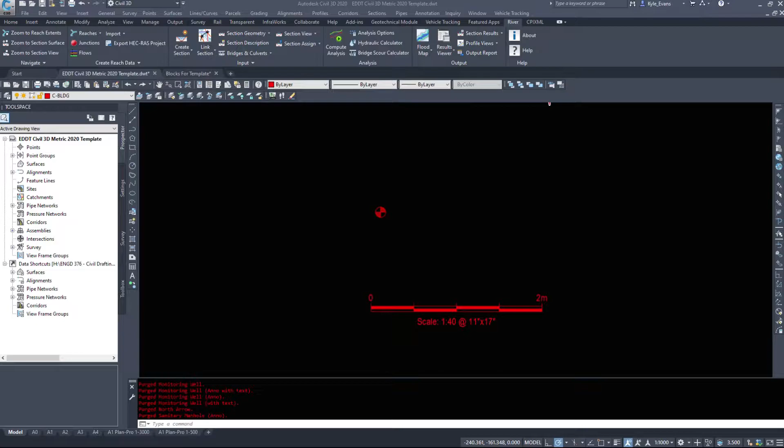Where I found this extremely useful is mainly under scale bars, under borehole or monitoring well blocks. If I want to change the color, I can quickly do that on the fly. However, the main one I use it on is my scale bar.

I'm not going to show you the scale bar option because it gets way too detailed and complicated with the various lengths and the various scales, and it's different. It's similar but different between Canada and the US, where we're in metric and imperial.

To demonstrate the visibility lookup, I'm going to click my little drop down arrow here. And inside of my scale bar, I have everything from a 1 to 10 scale to a 1 to 300,000 scale built into the scale bar itself.

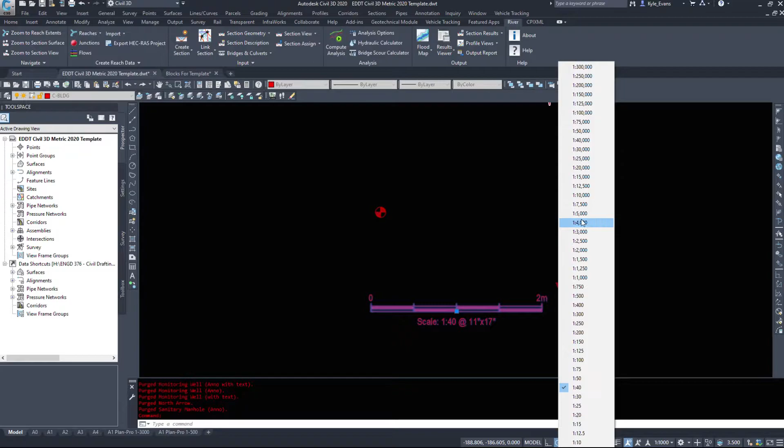So essentially, I've got about 25 to 30 different blocks within this block. Any option I select changes the piece of text in the top right and the piece of text down below. So I've selected 1 to 4,000, add an 11 by 17 drawing. I've got scale bars for 8.5 by 11 and D size paper, 22 by 34.

And I can select whatever options I want. Now I place this scale bar in paper space, so whatever scale I choose to set my scale bar to, I know it's always correct.

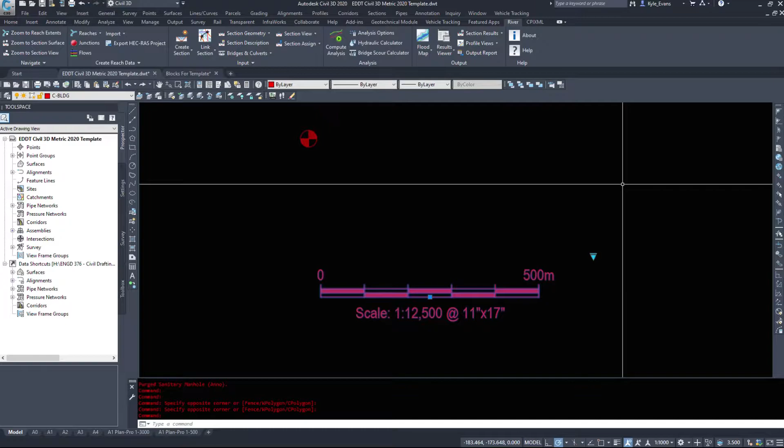I also don't have to rely on the built-in ones within Civil 3D, as I tend to see that those do happen to cause problems and general issues for the user. So any one of these I choose, we see that the spacing of the hatch changes, the spacing of the lines changes, the text changes.

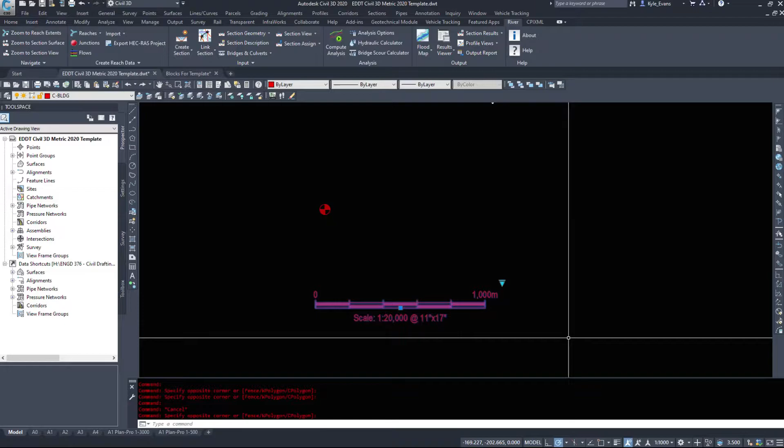Essentially a one-size-fits-all block here. We're not going to do a scale bar in the visibility parameters. We're going to do a simple borehole that we can choose blue, green, or red and work from there.

So again, I'm just starting off with pieces of lines, arcs and lines, and I'm going to make that a block. I'm going to name this borehole. I'm as well going to pick a center point, and my objects I'm going to specify.

This one I will make annotative because I tend to put my borehole blocks in model space, and we want it to adjust to our paper size. It just gives us the ability to add additional options. I'm going to hit OK.

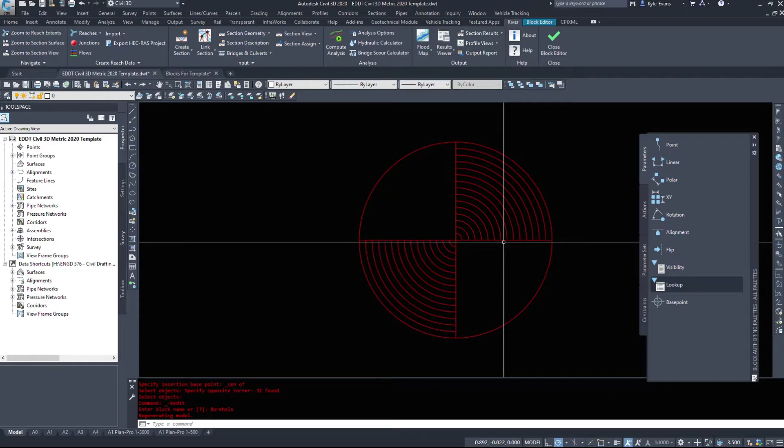And I had to click redefine because I already had a borehole block in this drawing. However, we're now inside the block editor.

Again, we're going to look under the parameters tab, and we want a visibility parameter. I'm going to place that in the top right of my borehole. And for some reason, it defaults me to the River tab, but I want to go into the block editor tab, where usually this section is grayed out.

So if I delete this, this is what we're given. I can place the visibility back in, top right, top left, put it really wherever you want. My visibility states now pops up.

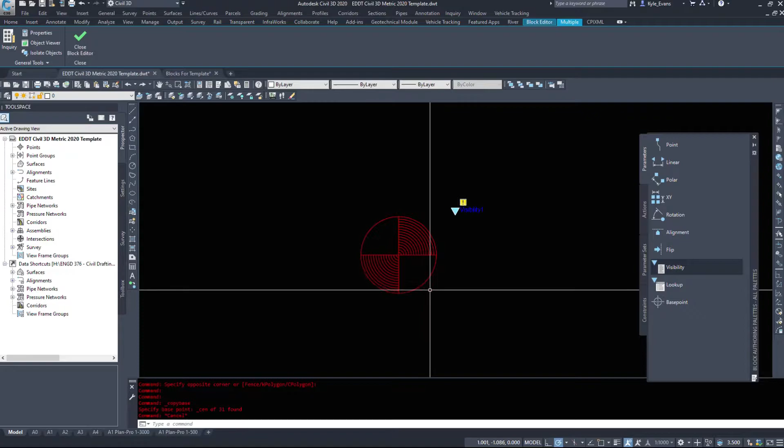However, I am going to copy what is here, just copy it at the center base point, 0, 0, so I can paste it back in. I'm going to also change these to print color 10. So this visibility state, the default visibility state, I'm going to have print color 10, or it'll print red in my template.

We can choose visibility states here. We want to access it with this button right here. It'll open up our visibility states window, and I'm going to rename this red borehole.

I want to create a new visibility state. We're going to call this one blue borehole. And I want to hide all existing objects in the new state because I want to create an entirely new set of objects. I'll hit OK. And that's set current. If we hit OK, our screen, the borehole disappears.

So I am now going to paste this back in to 0, 0, 0, and I'm going to make these color, we'll do 170. If I click the drop down arrow here now, I can switch between red borehole and blue borehole. Let's create a couple more visibility states.

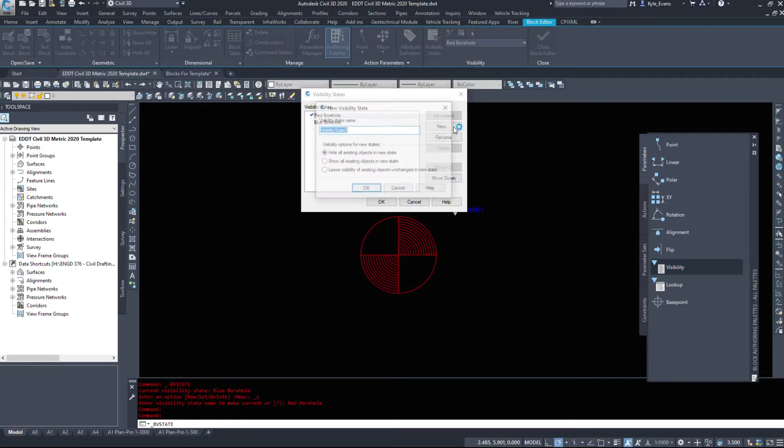We'll name one green borehole. And again, hide all objects. We'll make a new one, purple. And finally, we'll do a pink.

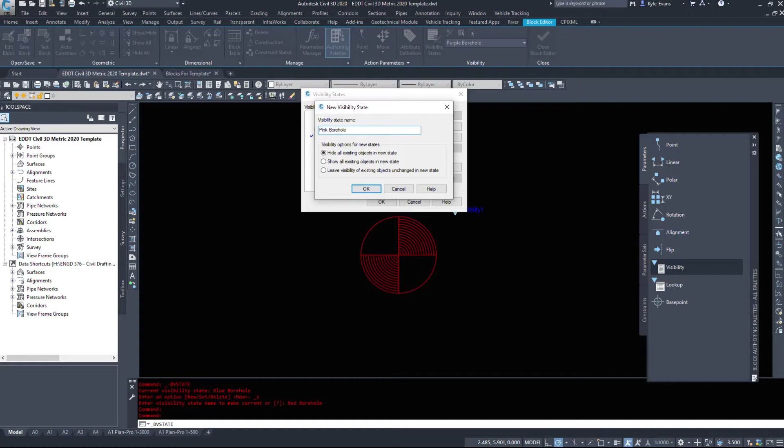So you can have any number of visibility states. As you saw by my north arrow, I've got about 30 in there. A lot of different options, a lot of different things you can do.

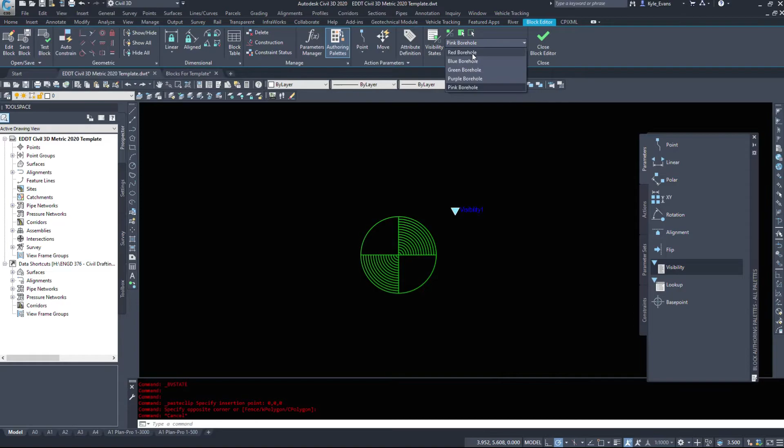So again, I'm going to come in here and paste that back in. And I believe this was set for the green color. My color 90 prints green. Or sorry, I was on pink. So we'll actually go back and make that pink.

We're going to choose purple, paste that in. Select the objects and we'll choose a purple color. And then lastly, we'll choose the green.

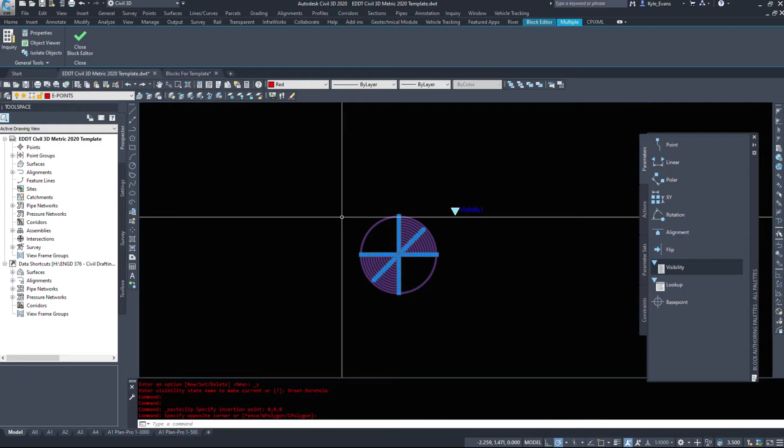Paste it back in. Now the reason I hide the existing objects is because we don't want the red borehole to show in the green section. So I hide the objects and create a completely brand new definition here.

I forget what the last color was. Green borehole. So we will select color 90, which I already thought I did this one.

So we can now cycle through the 5 visibility states. We have red, this should print color red, this should print blue, green, purple, and pink.

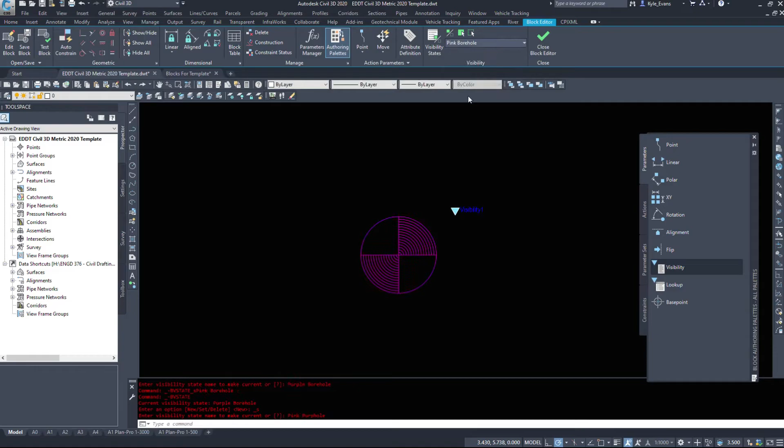Now if we click close, we'll save the changes. It defaults to the red borehole. If I click the drop down arrow now, I have access to add in my blue, I can change it to green, purple, and it's going to keep this visibility state.

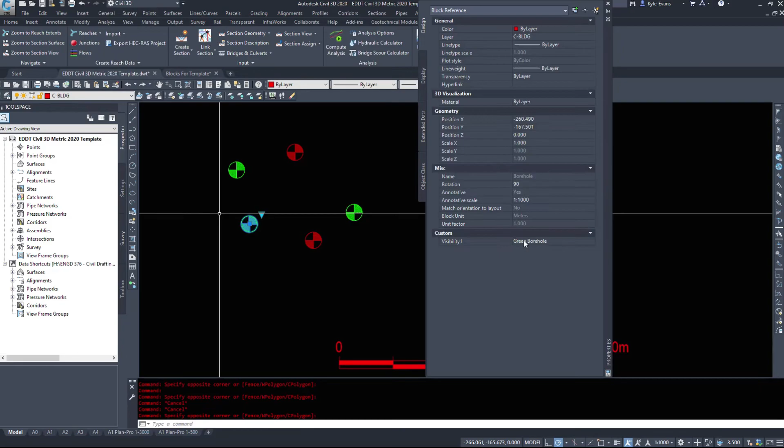If we look at properties as well, we can change these en masse. So I can select 5 or 6 different boreholes. So say we had 5 or 6 in this drawing. I could come in here and I could change all of those to the specific colors that I need. I could change just a couple of them. So say I wanted these ones to be red, this one to be purple, and I could set up my blocks as a visibility state to do this.

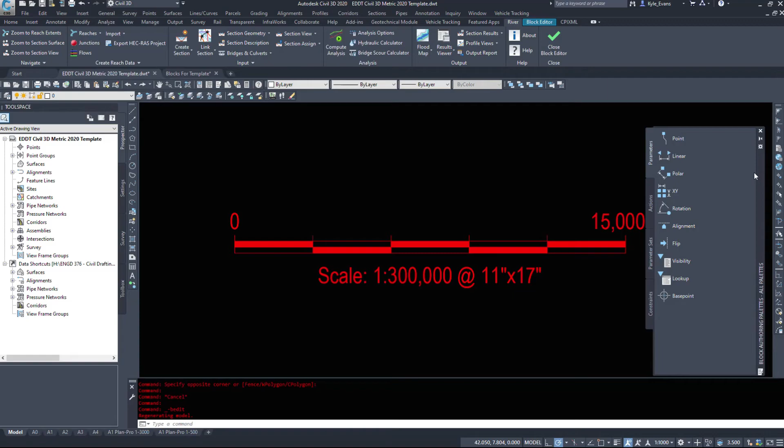Again, like I said, the place that I do use it most often is on a scale bar. I just find it easier to go and select the scale you want instead of using the automatic scales within Civil 3D or using the drawing a new scale bar every single time.

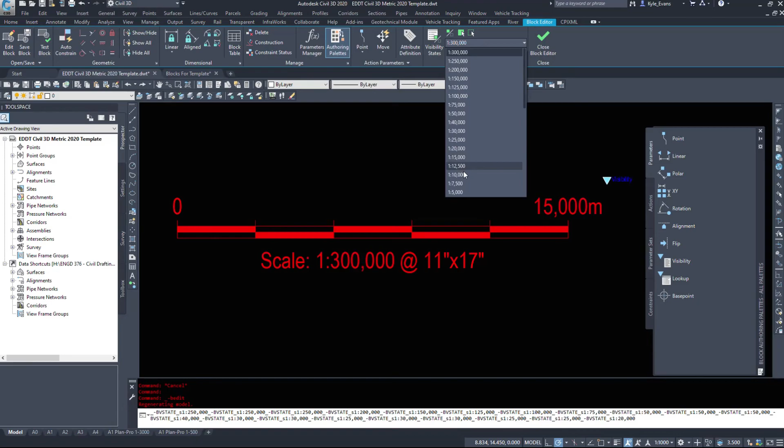So again, I'm just going to show you the visibility states in here, 1 to 300,000, and if I hover through them, it updates on the screen. You can see that I have a whole bunch of different options. Essentially, I have a whole bunch of different blocks built into this one specific block.

So that was a quick look at the visibility dynamic block options within Civil 3D.